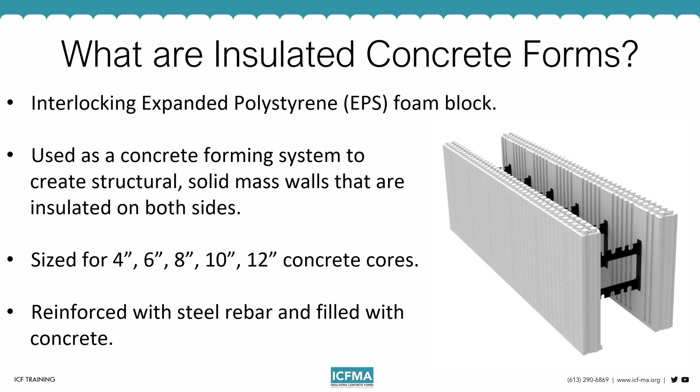An ICF wall completes many different tasks at the same time. As we talked about, this is a stay-in-place forming system, taking the place of traditional forms that you'd remove after a pour. You have a structurally reinforced concrete wall—the rebar fits onto the plastic ties, and those ties function in place of tying all the individual rebar by hand. You can snap those in place, saving time and labor.

Also, how an ICF cures and sets up, it functions with the foam as a continuous air barrier. You have continuous insulation on both the inside and outside of the wall, and EPS foam is tested as a vapor retarder in most cases. Depending on the specifics of the manufacturer, it typically performs as a class 2 vapor retarder. So you don't need house wrap or a vapor retarder on top of that outside surface, and you don't need an air barrier anywhere in the system.

The system also has plastic ties which work as embedded furring strips, giving you attachments on both the inside and outside of the wall to attach finishes, like sheetrock on the interior. ICFs also have a low sound transmission rating, often rated up to about 54 with a 6-inch wall, and they're well known for their fire ratings, typically rated between 3 and 4 hours.

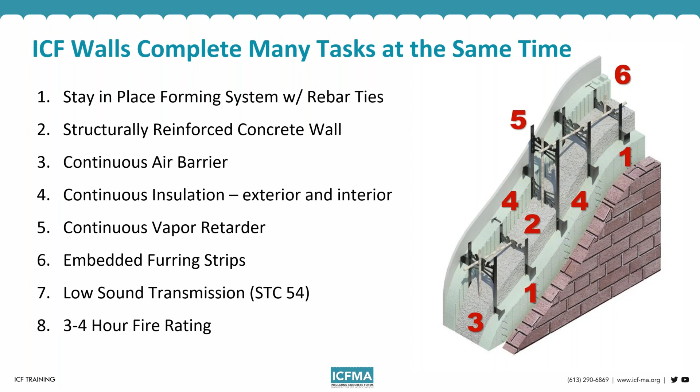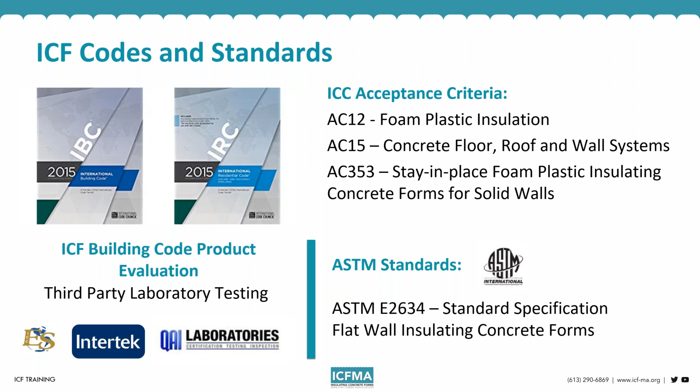ICFs are also well adopted in the code—we're adopted in the IBC and the IRC. When looking at other acceptance criteria, we also look at different standards that are tested and analyzed. Most often, companies will have an individual third party evaluate the products and test them for certain standards required by specific code. So if you have questions about any code or code processes needed for your specific build, individual companies can provide that information.

So now I want to talk about some of the largest benefits of ICF construction, some of which you may already be familiar with. One of the biggest things we often talk about is the fact that you have a system that is extremely disaster resilient. We're building solid mass walls reinforced with steel, and these systems are able to resist extreme wind loads. They also have a high fire rating, and we have multiple test cases of ICF structures that have survived hurricanes and really big high wind events.

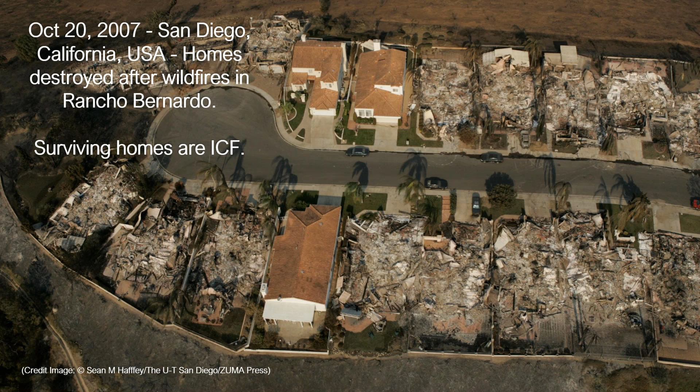Here's also a picture of some wildfires that happened outside of San Diego. These are three houses built using ICF. You can see how when you can really enclose the building envelope and seal it up, and your walls are rated to a 3 and 4 hour rating, your structures are much more likely to survive these types of extreme events. This is something, as an industry, we really try to promote. We try to promote disaster resilient construction, and we've tried to provide solutions to builders in varying ranges to build structures that are going to last and survive extreme events.

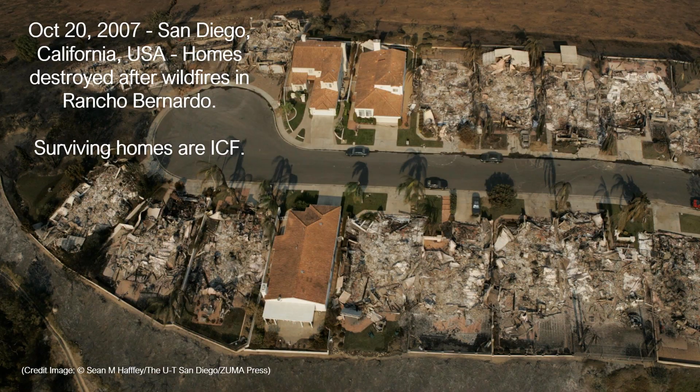The other component we often talk about with ICFs really has to do with their performance and their thermal performance. A couple of years ago, in 2018 and 2019, the ICFMA commissioned a study with a research lab in Canada called CanBest to do a series of hot box tests to basically compare the performance of an ICF wall against several different cavity style constructions.

We compared everything from a 2x4 construction with R14 insulation to wood frame construction, 2x6 wood frame construction with R20 bat insulation and also R5 continuous insulation on the outside. We also did the same with a steel frame construction. What we looked at was basically how that wall performed in comparison to these other types of systems.

What we found is that an ICF wall at steady state performs at an R value basically at an R23, but there's also some very interesting things that happen as that wall transitions to steady state in a hot box setting.

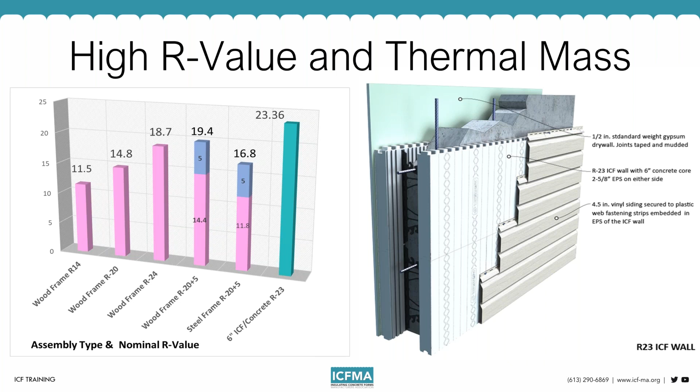To quickly show what a hot box basically is, if you're unfamiliar with that, it's a chamber, and you divide that chamber into two sides. So you have a controlled setting, a control side, and an environmental side, and the wall sits in the middle of that, and you look at the amount of energy that transfers between those two sides, which allows you to get a couple calculations out of it.

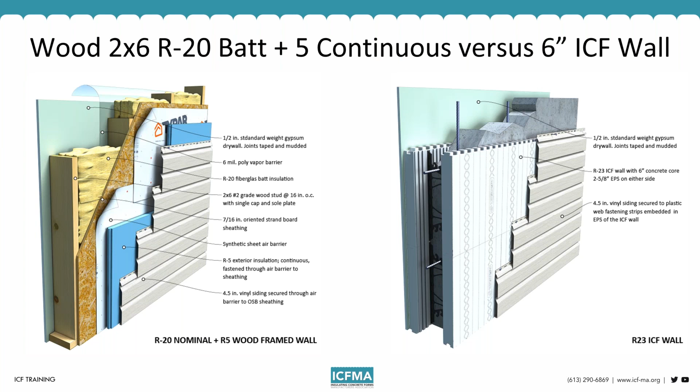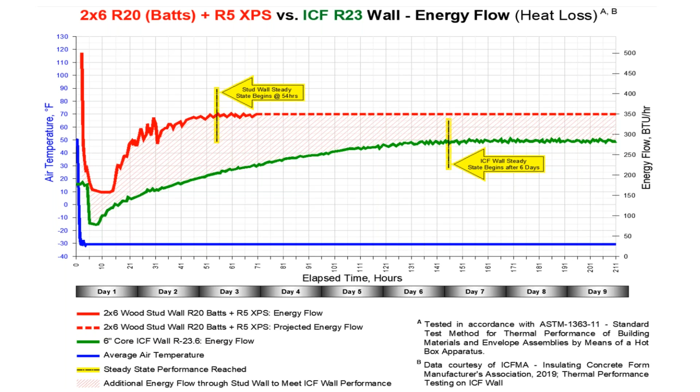It also takes the wood wall about 54 hours to get to steady state, whereas the ICF wall takes over 6 days to get to that point. So during an extreme weather event, an ICF wall is going to outperform any type of cavity construction over that longer period of time.

This was fascinating research for us, and it's something we've tried to continue talking about in our industry, looking at the overall performance of an ICF wall compared to other technologies. I'd encourage you to research this further and learn about these features.

But at the end of the day, what this really means to the owner of that building is that you're going to save a tremendous amount of money on heating and cooling bills. It helps with overhead costs to maintain the structure long term, so you're building a building designed to last, designed to resist extreme events, and it's going to perform thermally at a very high level compared to a lot of other styles of construction.

To move on to the next phase of this conversation, I want to give you a quick overview of ICF installation and how ICF forms are assembled and put together. A lot of what you'll see here today is more residential focused, but the basics apply to a commercial setting also. This is just to give you a foundational view.

How ICFs are installed: traditionally you install ICFs on some kind of poured footing or pier, or a foundation wall you've already gotten in place, that you're going to build up from. You start at your corners, lay those out, and then basically infill the walls to a central point.

You'll place your straight forms as you move to what we'd consider a common seam, or occasionally your blocks will align up with a specific dimension. ICF blocks are very easy to cut, so you can cut to fit them to any size you need. Once you get your first course laid out, you'll put your steel in place.

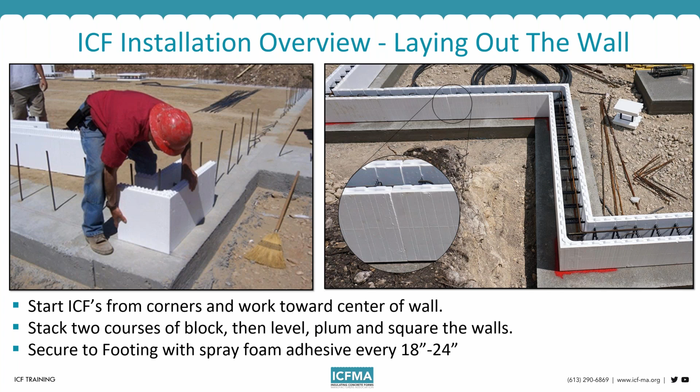And then you continue up with your next layer. Once you've gotten your first two courses done, you're going to square your walls, make sure everything's in the right position, and then use just a little bit of spray foam to secure your walls to your footing. At that point, you're ready to continue on up your wall.

As you install the blocks, it's very important that you create a running bond. On most manufacturers' corners, you have a short side and a long side, so every time you flip the corners, this creates an interlock between all the blocks between courses. This is a simple graphic to illustrate how all the blocks tie together and line up as you continue up your wall.

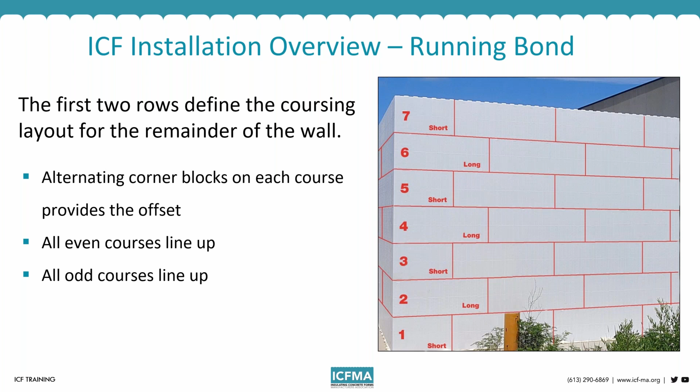Most of the time you'll have horizontal bars each course or every other course, and vertical bars placed into the wall once you have it stacked up. You can lay these out so you can build basic chases to drop your vertical bars into place, allowing you to do all the rebar placing with very minimal tying, making it a very fast and efficient way to install the product.

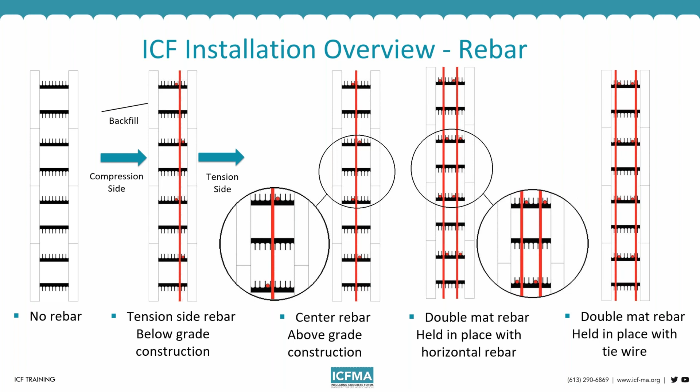There are also several different ways to finish out your doors and openings. This is a very common question about the system. Many manufacturers have EPS buck systems, which are foam products to finish off their walls, or it's very common to use wood bucking in most situations to basically frame out your doors and windows.

Also, as part of the system, typically you're going to install walls with some kind of bracing system. There's many different ICF bracing systems out there, with a lot of different applications for different sizes of structures. Depending on your specific needs, you may need a tall wall application, or your bracing system may need to align with a masonry style bracing scaffolding system. There's a lot of different resources out there to get your project built.

What an ICF bracing system is going to do is function as an alignment system. Once you get your wall stacked and secured, this works as a platform for you to continue building up your wall. Then once your concrete is poured, you're going to use the system to basically plumb and straighten your wall, so you have a nice finished wall that is nice and straight.

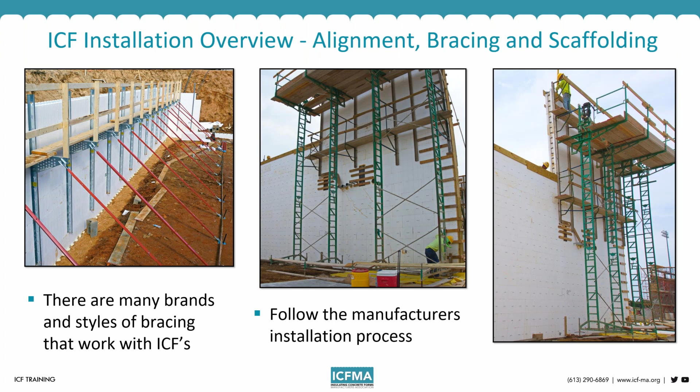There's also many other ways to attach to the block. Depending on your specific needs, there's going to be different penetrations or different systems that allow you to create embedments. Depending on what you're trying to attach to the wall, how you're doing your floor systems, or how you're doing your other mechanical systems, it's best to do a little bit of pre-planning before you get to the concrete phase, so that you ensure you've made all the penetrations and things necessary to get through that wall.

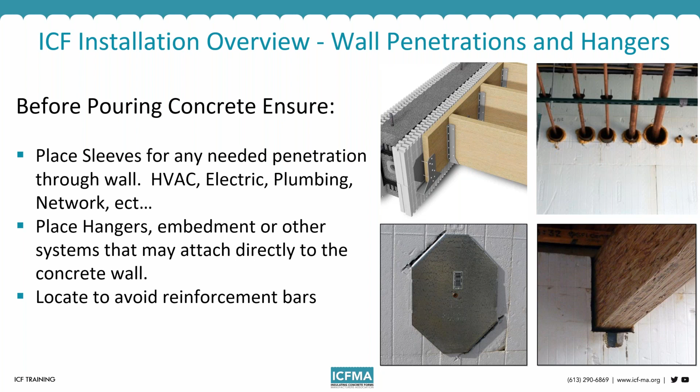It's no fun to have to go back and core that wall to make penetrations for anything mechanical or to do other types of things. This is also an area where lots of people have questions, and so depending on the type of system that you're trying to use with your building, there's a lot of technical resources that manufacturers have put together.

Just a quick little overview of how concrete is poured. Traditionally in the industry, you're going to pour this in 4-foot lifts. You'll start in one place, basically walk around the complete structure pouring 4 foot, and then immediately start your second lift. You'll continue up to the full height of your wall, and finish all of that in one single day or one single set of pours.

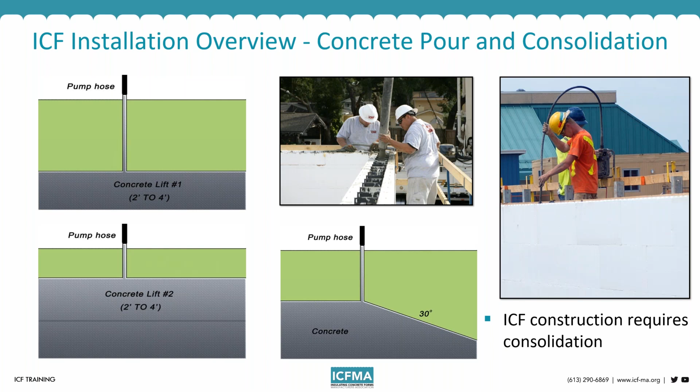Typically, you want the concrete running a little bit out ahead of you, so you'll want to manage your slump and manage how all of that goes together. Again, anything you want more information on, we'd be more than happy to help and give you some additional resources.

So kind of just to wrap this up and give you a little sense of what you can do and build with ICFs, we wanted to just quickly review a couple applications for ICF construction.

ICF buildings are really not limited in what they specifically can do. They're useful in residential, multi-story, built commercial, institutional, hospitality, churches, theaters, industrial, agricultural, safe rooms. Basically, you name it, there has been something that has been built out of ICF. There are tons and tons of applications, and it's a very flexible system to build whatever you can imagine.

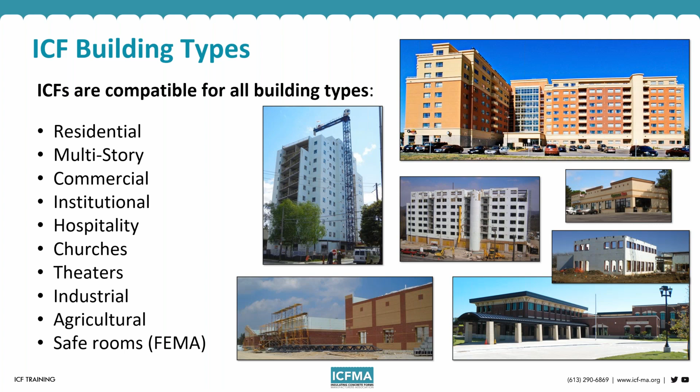There's multiple different use cases of this being built in the multifamily setting. It's a wonderful use in this specific situation, especially for the ownership and management group, just because of how energy efficient and how quiet these buildings are. You can really have a nice product to put out to your clientele, and people really appreciate the qualities that ICFs can give to this specific market segment.

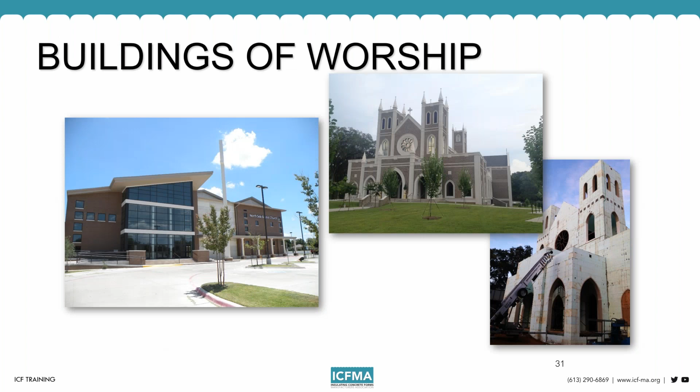Hospitality - many hotels and areas are built out of ICF construction. Institutional - there's been multiple different schools and net zero schools built using ICF technology, and it's a very popular way to hit this specific market segment. Also medical facilities, hospitals, churches - this is a very popular area also. And commercial - definitely a great application for those that are going to own this building long term and make a return over a longer period of time. And industrial and agriculture.

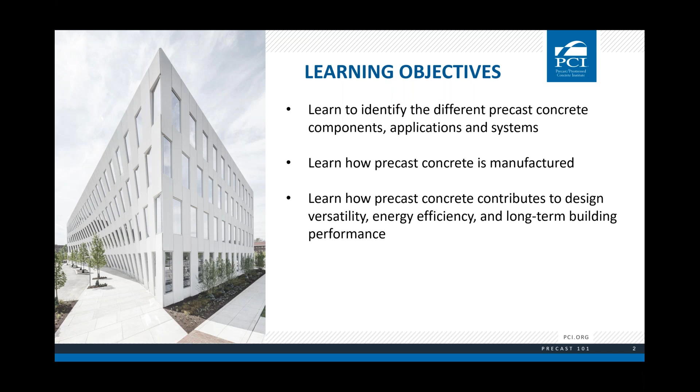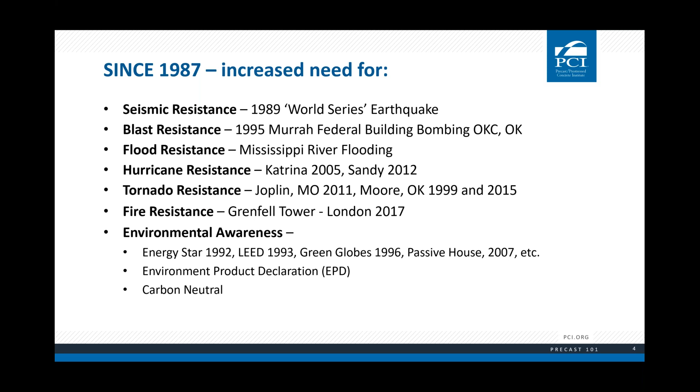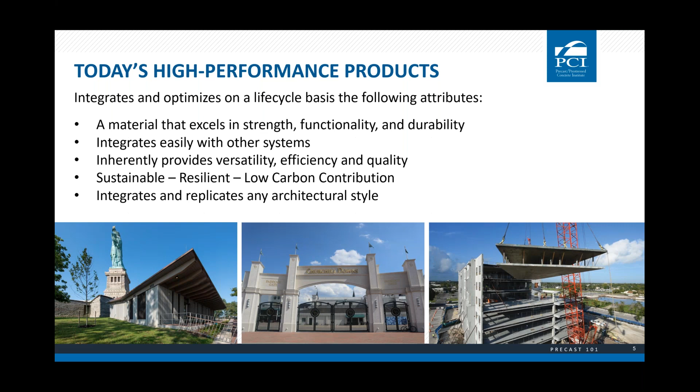This has highlighted the importance of building high-performance structures with high-performing materials moving forward. A high-performance material or structure is one that integrates and optimizes, on a life cycle basis, attributes like strength, functionality, and durability, along with the ability to integrate easily with other systems, be sustainable, resilient, and versatile. So as we go through the presentation today, I'm hoping we can help define how you can take advantage of precast concrete's high performance characteristics.

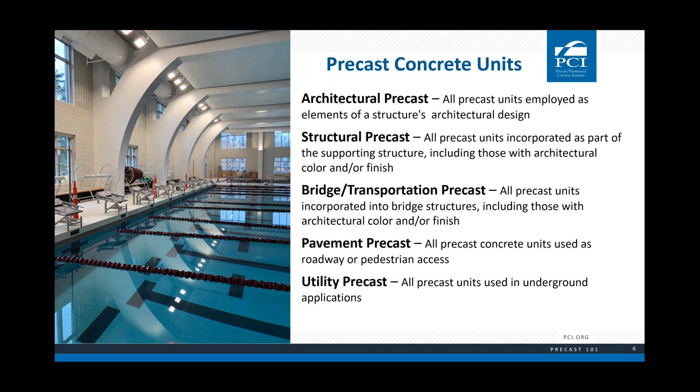One way is that there are over 250 PCI certified plants across North America that produce a wide range of precast concrete products, including architectural precast, structural precast, bridge or transportation products, precast for pavement applications, utility and underground products, and more. For today, we're going to focus on architectural and structural precast components and their use, to help simplify the message, especially since this is primarily an overview.

Architectural precast is simply defined as any precast elements with an architectural color, texture, or finish. It can be a structural element or a facade panel. These panels can be solid concrete, insulated panels, load-bearing, and they come in just any shape imaginable. The only limitation is your imagination and the size and weight that we can haul on a truck.

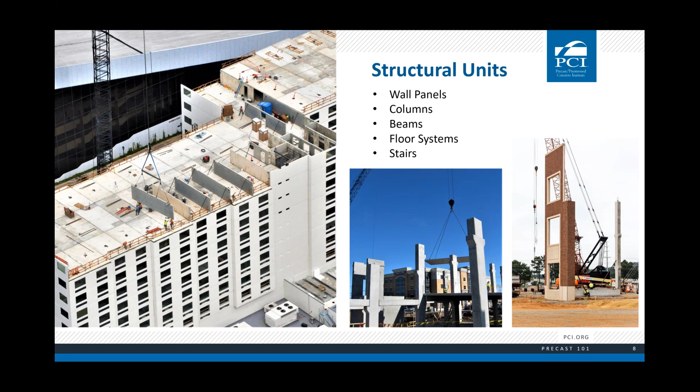Structural units are components that carry load and are typically categorized as wall panels, columns, beams, floor systems, stairs, and risers. I think we're all familiar with concrete, but what I want to point out is that concrete used in precast applications is a high early strength concrete, and it also includes additives to accelerate the curing process, resist the effects of freeze-thaw, and reach high compressive strength, especially in structural components with long span members.

So back to defining precast, right? I know I'm talking in a circle, but precast concrete is simply defined as a concrete component that is cast in a specific shape at a location other than its in-service position — for example, off-site in a controlled manufacturing facility that follows a strict quality control process. This allows for year-round production with very few interruptions to your project schedule.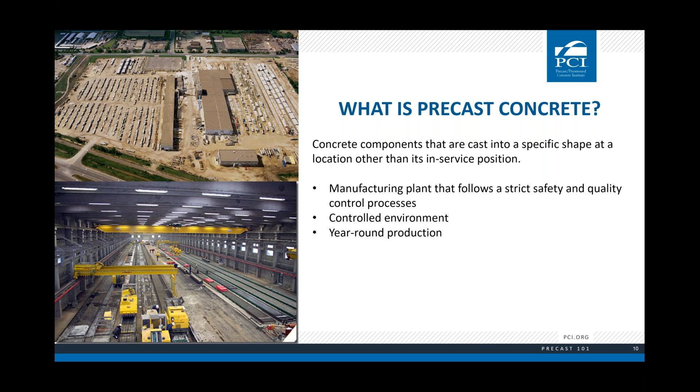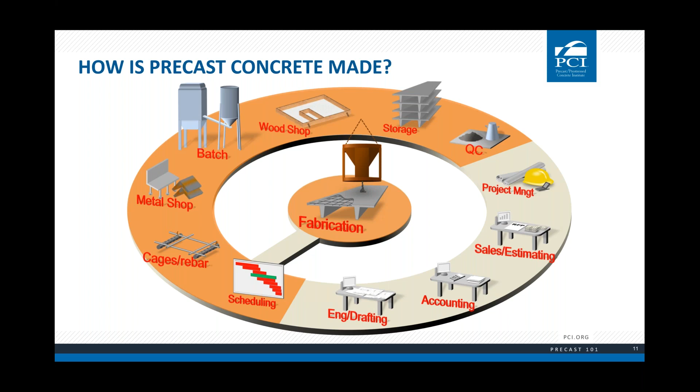So how does a precast plant work? This is important to fully understand, especially when you're starting to consider products for a project. There are a lot of moving parts and independent departments, from project procurement to finished products, in a precast plant. Every department supports the fabrication floor or the casting beds. Going around this circle, you can see that each department must be precisely choreographed and fully collaborative to ensure the just-in-time delivery of the product.

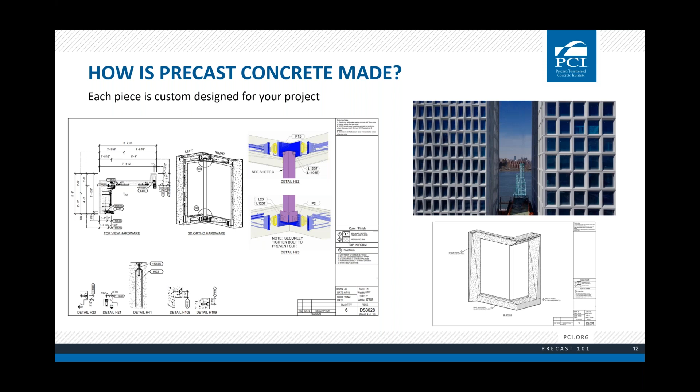Starting with engineering: shop drawings are the responsibility of the precast producer. Each precast piece is identified, engineered, detailed, and checked before production.

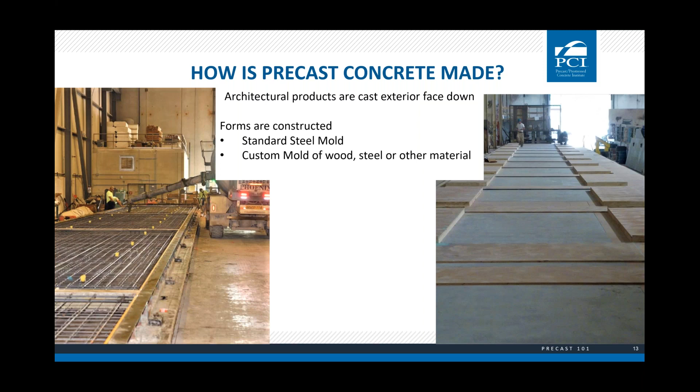The wall panels are produced on large flat beds, some on long line steel beds, others in custom wood molds. But every plant is different, so it is advisable to proactively visit a local precast plant to get a better understanding of their specific production process.

Structural products are typically produced from standard steel molds. These molds are pre-designed for the individual product being produced and range from 100 foot up to 500 foot long. The photo on the right is a 15 foot wide by 300 foot long wall panel mold, and on the left you can see a double T floor system mold about the same length, 300-400 feet long. The cross section of these molds are fixed, but the individual piece lengths are adjustable to meet the project demands.

Moving back over to custom architectural casting beds, they typically start with a large flat bed, usually 40 to 60 foot long, 12 to 15 foot wide. The panel molds are custom built to just about any shape, size, or configuration, as you will see in some project examples. But once the mold is complete, cast-in items such as thin brick, stone, terracotta, along with reinforcement, blockouts, electrical conduit, backforming, etc., are all inserted.

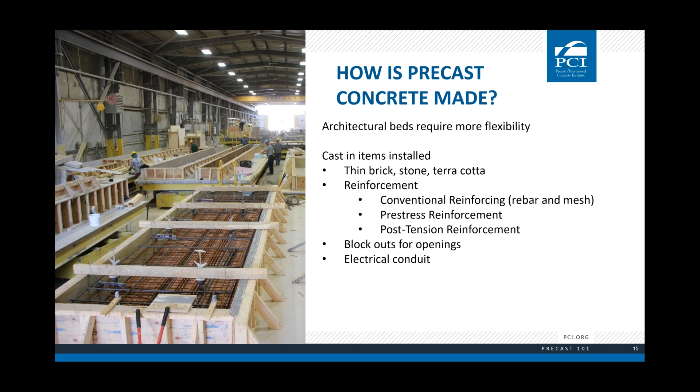Architectural components are poured exterior face down. So when the form is ready and inspected by the quality control technician, the concrete face mix is prepared and poured into the mold. In most cases, architectural precast panels are produced with a face mix and a separate backup mix. The reason is that the backup mix is typically not exposed to final view, so the producer can use a less expensive concrete mix than the exposed or architectural face mix.

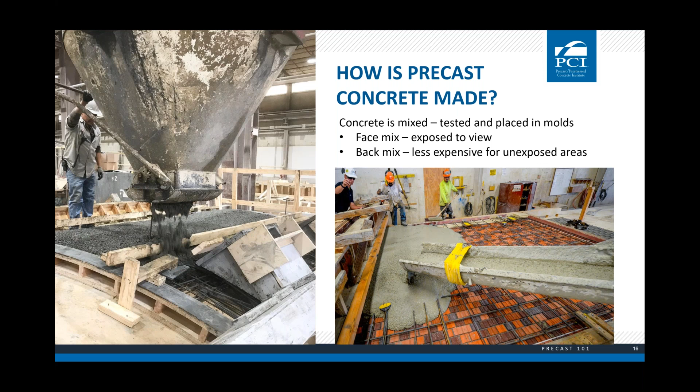Once the concrete is poured, the upside of the form, in most cases the back side of the panel, will need to be finished. For unexposed units, a simple wood float or leveling float is required. However, if the back finish is exposed to final view, the designer will need to specify a finish treatment like a broom finish, a steel trowel finish, or maybe a USDA approved finish for food production facilities.

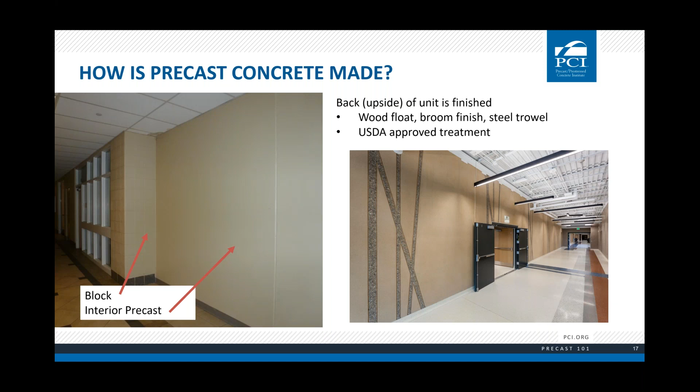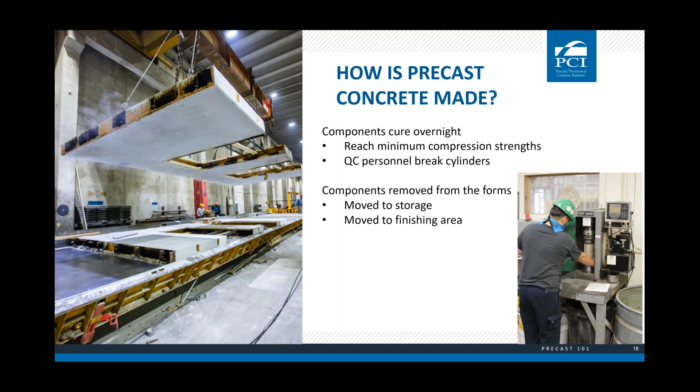Depending on the product being produced and the mix design required for that particular product, the concrete is designed to cure in 8 to 12 hours. Once it has reached the minimum compressive strength, the units can be removed from the forms and moved to the finishing storage area.

Architectural precast can be finished one of several ways, and in many cases multiple finishes can be applied to the same panel to provide unique visual interest accomplished only with precast concrete.

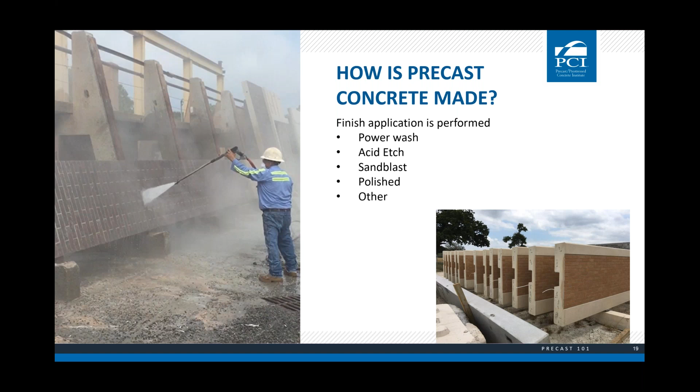Once finished, the products are moved from the storage area and loaded onto trucks and shipped to the site. Once on site, the products are installed onto the building directly from the trucks without the need for any type of laydown area.

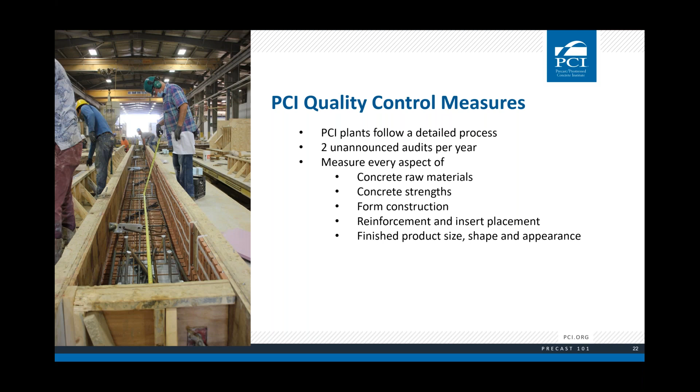Every step of the process must follow PCI's quality control program. Every PCI certified plant receives 2 unannounced audits each year by a third-party engineering firm that specializes in precast concrete production methods. The program includes inspecting and documenting every step of the production process from raw materials to final installation. The basis for the audits are included in the PCI's body of knowledge. These manuals describe the production processes to follow when producing quality precast concrete products and can be found at our bookstore online at pci.org.

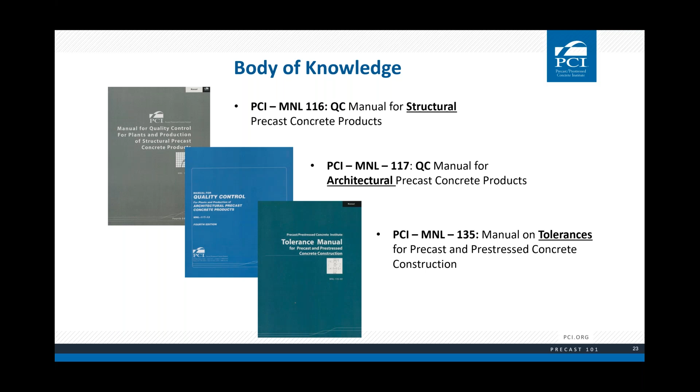Now we have a general understanding of how precast is made. Let's look at those individual components and how they're used. Precast columns and beams are made to specific sizes and lengths to meet your project structural demands. To give you an idea of their capabilities, columns can be as high as 3 stories tall, and beams can routinely stretch out to 30+ feet long.

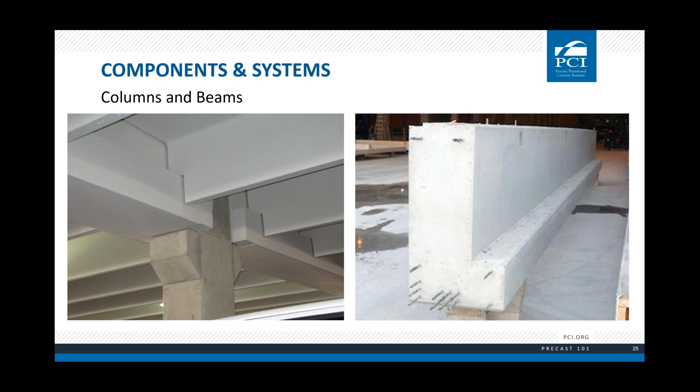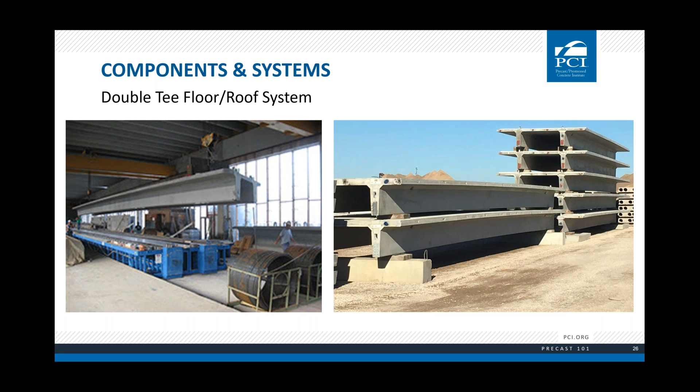Double Tees provide excellent roof and flooring units because they can span considerable distances. These long spans will expand a designer's options for floor layouts, reduce the number of columns required, and expedite the construction process as compared to traditional methods. As with double tees, hollow core planks can span long distances and can be erected very quickly. Compared to traditional wood floors, they provide acoustical and impact dampening and strong fire resistance.

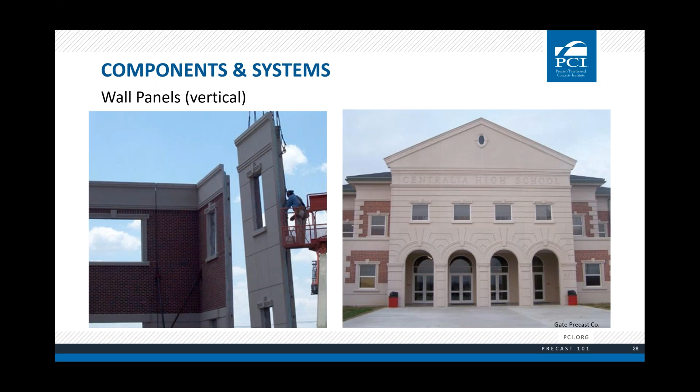Wall panels are extremely versatile and offer tremendous design flexibility. Shown are vertical load-bearing wall panels that encapsulate continuous insulation. The panel and insulation thickness can vary based on the project's structural needs and the R-value requirements.

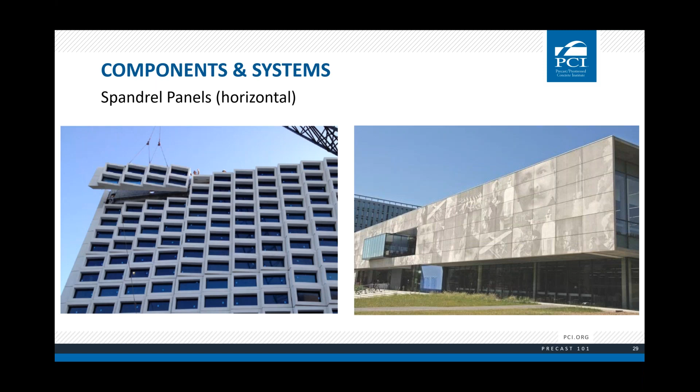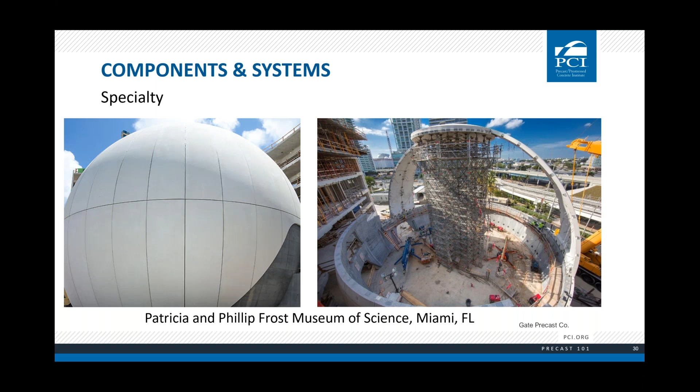And this project kind of exemplifies that. PCI producers are expert mold builders that can bring most any vision to life. So I definitely encourage you as an architect or designer to work with a precaster early to fully understand what their capabilities are and how you can incorporate your vision into your next project.

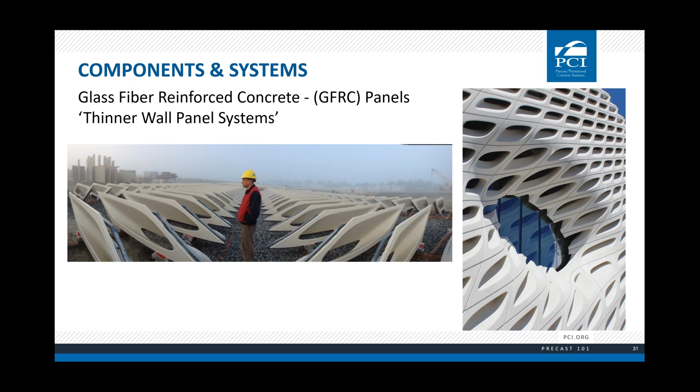Glass fiber reinforced panels are gaining in popularity because of their lightweight. The best way to describe them is a thin skin of concrete attached to a steel stud frame. Not all precast producers produce a thin wall product or GFRC panels, and in many cases, a solid precast panel is a more economical or better choice based on how the mass of solid concrete contributes to the overall structure's performance.

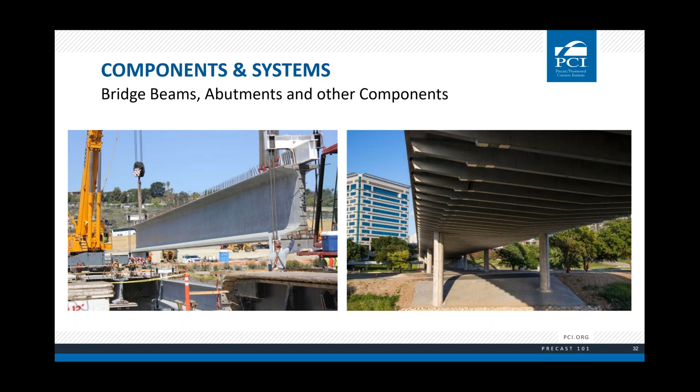Most elevated or vertical components for bridges, whether for pedestrian bridges or transportation bridges, can be produced using precast concrete girders, box beams, abutments, deck panels, and other components.

So now we've taken the next step, right? We've looked at production, we've looked at some of the different components, and now let's kind of put them all together into total precast systems. There are 3 basic precast structures available: rigid frame, interior shear wall, and exterior shear wall.

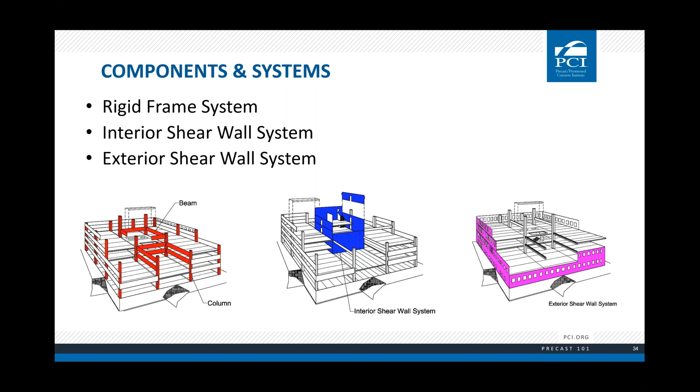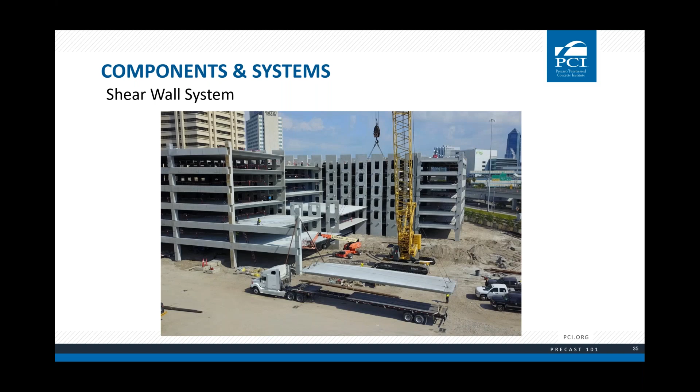A shear wall system uses interior or exterior shear walls in either a horizontal or vertical orientation, along with columns, beams, double T's, and stair towers to form the entire structure.

Now, when we switch over to a rigid frame system, all lateral loads are transferred to a moment-resistant frame that ties beams and columns together with rigid connections. In this case, the need for shear walls is eliminated.

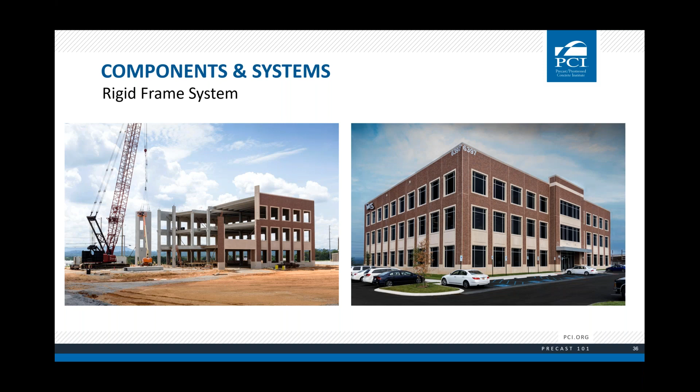And actually, the exterior panels are serving triple duty here. It is your structure, it is your enclosure, and it's your architectural appearance. And when you use a fully insulated panel, it could be your interior finish also.

Now, switching over to architectural precast, it's truly one of the most versatile mediums available today because of its adaptability to any architectural style. And that is because precast is extremely fluid, it's very flexible.

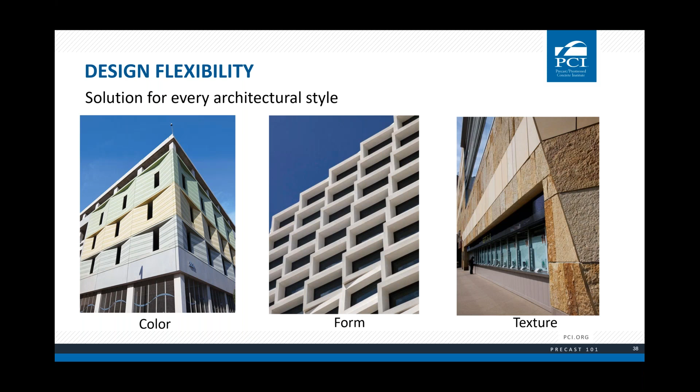So the precast can be produced in diverse colors, just about any color under the sun, by adding additives and aggregates. You can provide it with different textures, as we saw before. And then the shape and the configuration is adaptable to just about any geometry or any form that we can create for you.

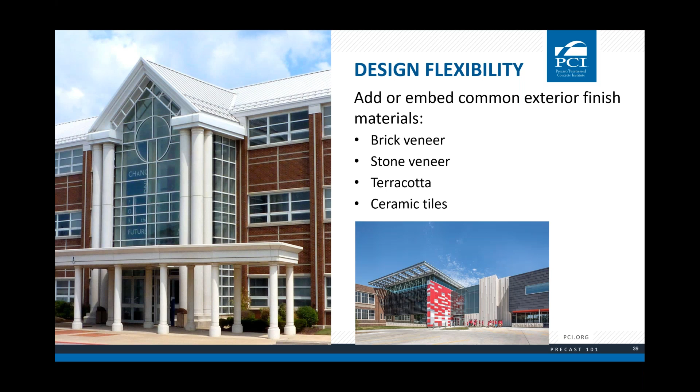Casting masonry products into precast is a great way to blend the benefits of precast with the traditional appearances of masonry. It's one of the most popular aesthetic features of architectural precast today. And the process is simple.

A form liner is laid down on the bottom of the mold, the thin masonry component is placed in the liner, and then the concrete face mix is poured. And all the other production steps we've just talked about are the same as far as stripping it from the mold, finishing the panel, and then having it ready to go to the job site.

But the number one way precast concrete can contribute to a more sustainable structure is fully insulated panels. This is done by encapsulating insulation between the face mix and the back mix. The amount and type of insulation is based on your particular project needs.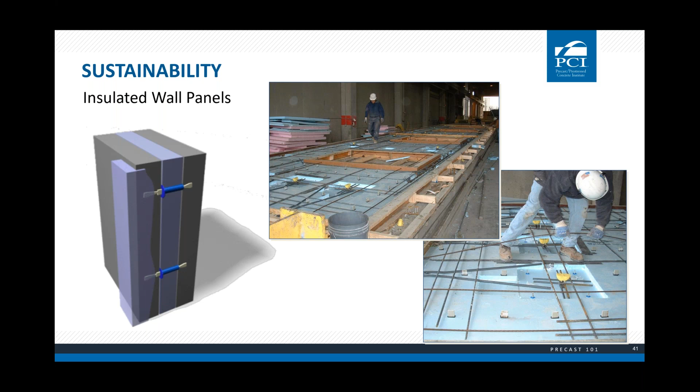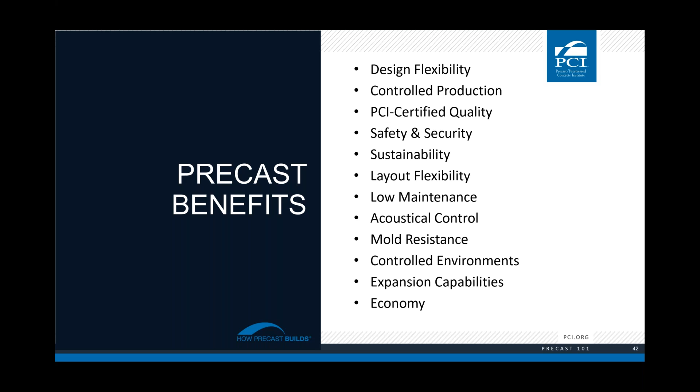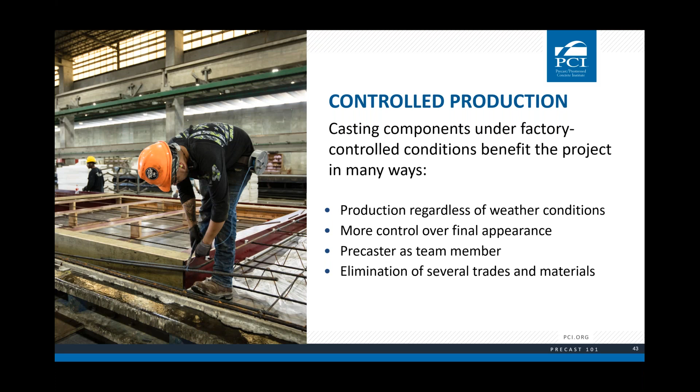Now, during our more expanded presentation, we would discuss all the many benefits gained by building with precast concrete, but today I just want to touch on a few. The first would be controlled production. All products are produced in a controlled environment, off your building site in a controlled plant. This allows for tighter quality control, and it avoids major weather delays.

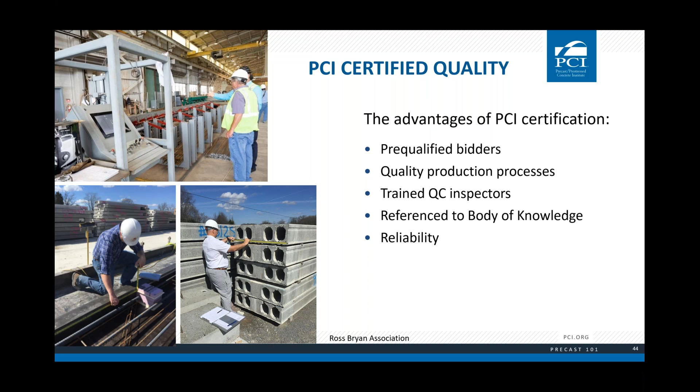And since 1967, PCI's plant certification program has ensured that each plant has developed and documented an in-depth, in-house quality control system. The certification process is very specific to the products being produced at each individual plant, and it aligns with PCI's body of knowledge, which again, you can find at pci.org.

To add credibility to what we've done for almost 60 years, most organizations and government agencies mandate or recommend PCI plant certification in their specifications. That's because PCI is not just an institute, it's not just an organization, it's a collaboration of producers who continually provide research and development to expand and enhance the building market.

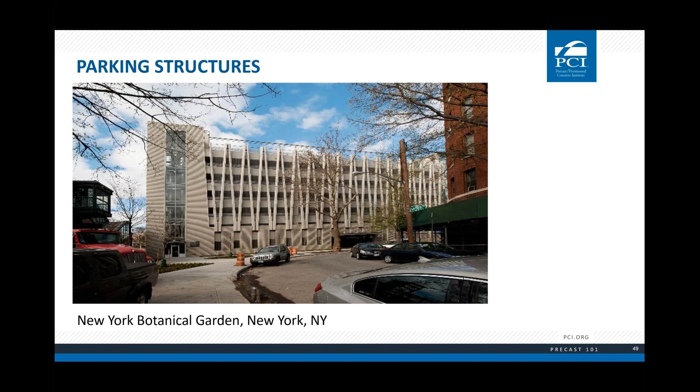So lastly, where is precast being used? Well, I like to use the old dad joke because I'm an old dad - where is it not being used? For the remainder of the presentation, we'll go through some examples. As Mike said with ICF, it's basically where has it not been used? Every type of building project you can imagine has used the benefits of precast concrete in one form or another. Parking structures are typically a complete total precast structure, but the exterior skin doesn't have to telegraph that it's a parking garage.

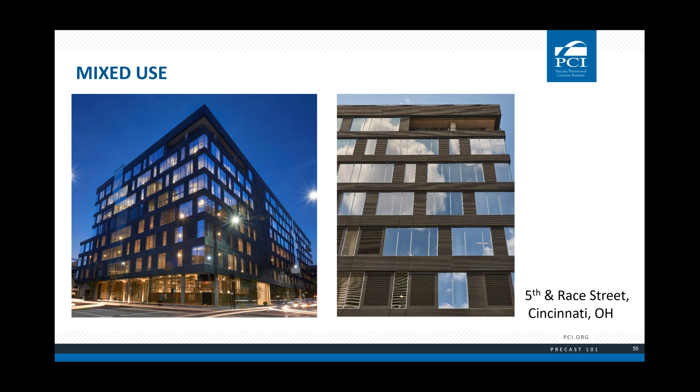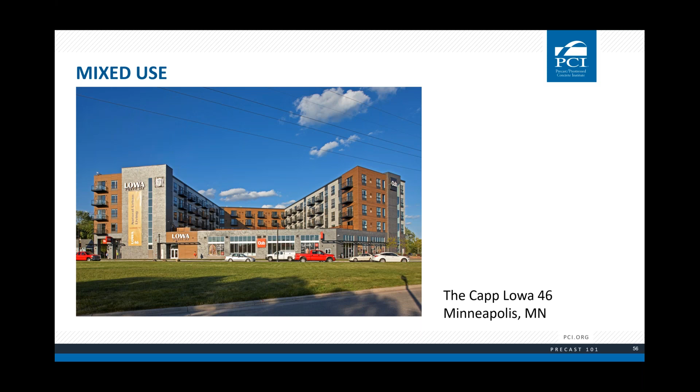Precast in retail has been a big market for us for the last 20-25 years, whether it's a national account like Nordstrom or a local developer. The speed of construction and aesthetic value has been big for them in using precast. Mixed use projects, whether it's a downtown setting combining office and commercial, or a rural setting combining retail and residential - both applications are fantastic for precast.

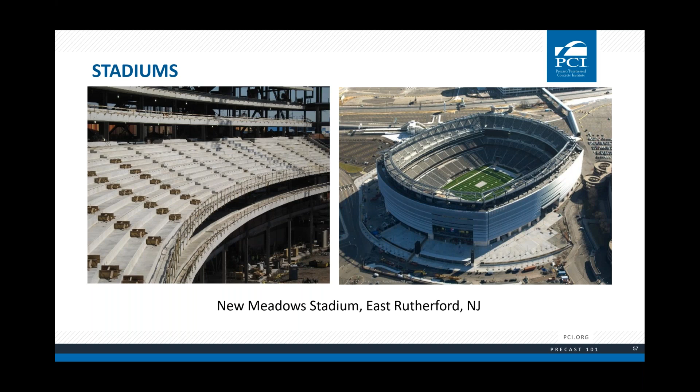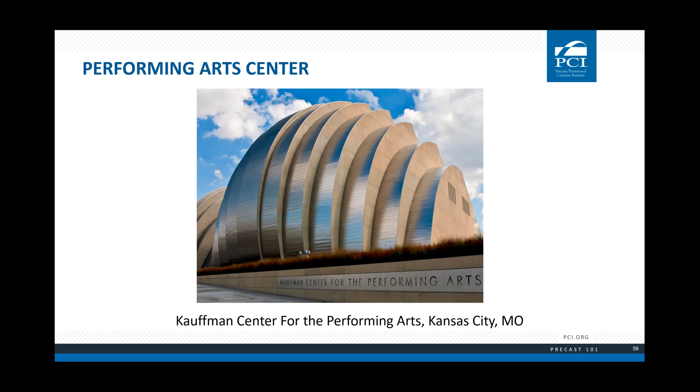Stadiums are kind of a no-brainer - columns, beams, risers, and exterior panels, load-bearing and non-load-bearing. When you've got a big, massive structure like a stadium or arena, precast speed to market is extremely advantageous. When you move to performing arts centers and museums, where you're trying to create an iconic look for your community, precast is a great solution.

Most people don't think of K through 12 as a precast-worthy application, but we're finding more and more of these, primarily because of the ability to make tall masonry-appearing panels for gymnasiums, and also for areas like fly houses for theaters, and incorporating FEMA safe rooms.

Government buildings, kind of a ditto - everyone's got the same thought process. How do we build faster? How do we build more economically? But how do we build a 100-year structure? When most architects ask that question, the answer typically is precast. If you're trying to make it more of a high-end product, we can cast in items like natural stone and masonry. We also look at low maintenance for precast concrete - a lot of municipal buildings look at precast as a maintenance-free enclosure system, which it is, especially for facilities like jails and prisons.

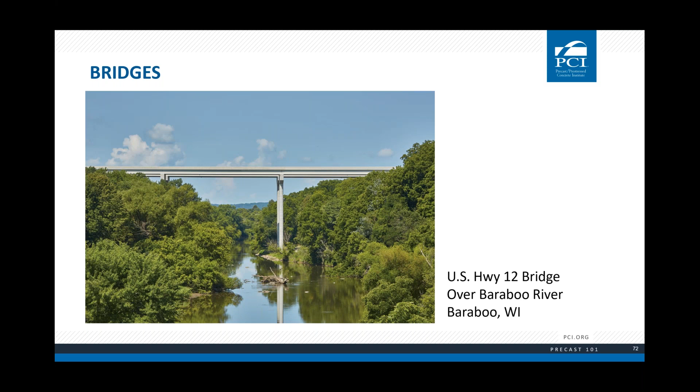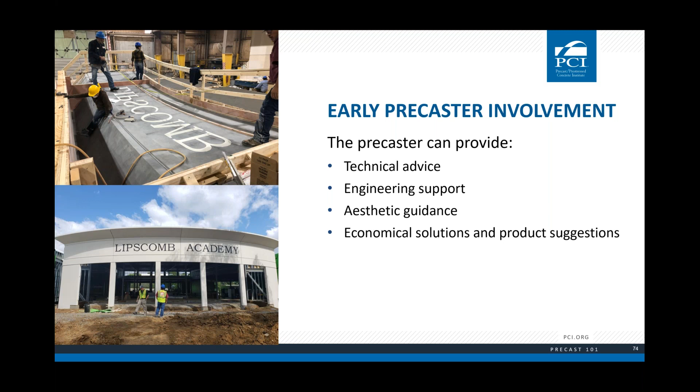So in conclusion, my best advice is to call a precast concrete producer early. What you're going to get out of that is a team member. Precasters can help devise solutions for structural challenges specific to your project, whether it's architectural or structural precast, because buildings can create unique design challenges, and with all respect, we don't always have the right answer. By bringing a precaster in early - spilling your guts and opening up your heart about what you've got to overcome on this project, whether it's speed to market, fire resistance, tornadoes, etc. - a precaster most likely will have a solution for you.

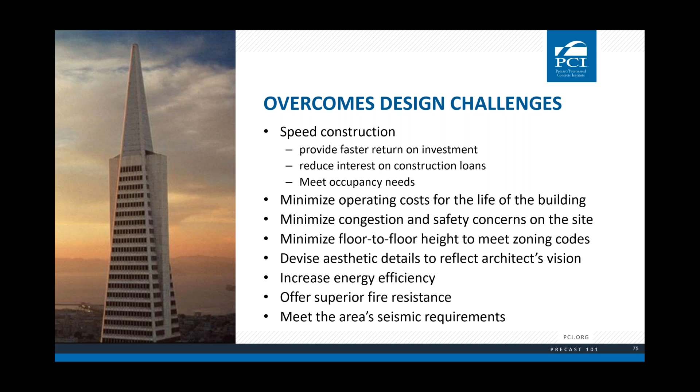So I hope this presentation, as fast as it was, demystifies a little bit about what precast is and encourages you to use precast on your next project. And with that, we'll go kick it back to Dave and Margaret for a Q&A session.

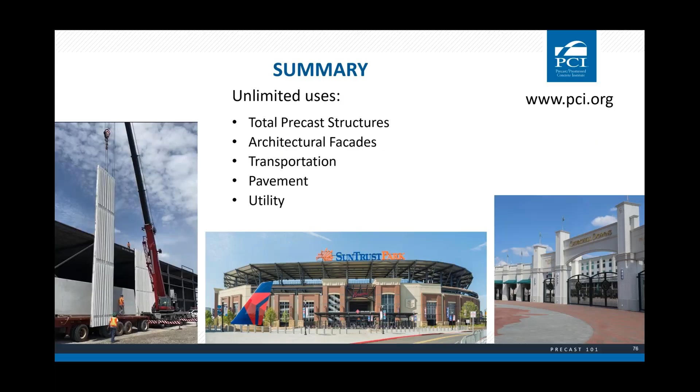Pat Mosites has a question for ICF around noise. Have you tested the wall for noise attenuation or airport noise? I know, Micah, you have commented on how quiet these systems can be. Can you comment on tests for noise transmission through the ICF walls, please?

Yeah, for sure. Basically, some of that comes down to some of the individual manufacturers that have done some testing. I am not specifically sure if anyone has done anything specific to airports. I know that there have been multiple instances where walls are tested for STC ratings. So I would be curious to probably talk to a couple of the companies and see if I could direct you on that specific question. I believe that most likely Nudura has had a project or two looking at those types of things. I would need to look a little bit more in depth for you.

Sure, so perhaps you can reach out to Pat afterwards here. Those of us that have been in these buildings know that they are extremely quiet.

So I have another question for you from Erica Winters Downey. Are there environmental product declarations, EPDs, available for ICF?